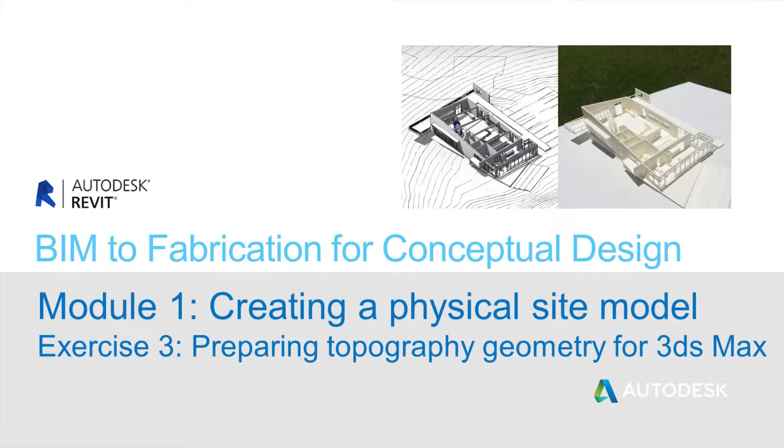In exercise 3, we're preparing topography geometry for 3ds Max. There's a few things that we need to do with the Revit topography geometry to make it work well with the CNC router. And we'll cover all of those things in this next exercise.

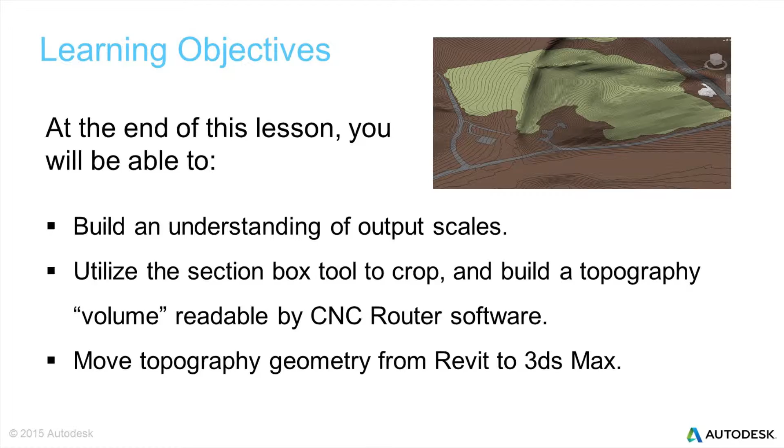So our primary learning objectives are going to be to build an understanding of output scales, utilizing the section box tool to crop and build a topography volume readable by a CNC router software, and moving the topography geometry from Revit into 3ds Max.

So looking at our current Revit topography model, one of the first things we need to do is establish a buildable scale for our physical model. So for an expansive site like this, I'm hoping that a scale of 1 inch equals 60 feet will work well. So one of the first things I need to do is build a new sheet inside of Revit. And this particular sheet is going to represent the size of my CNC router, not the software, but the actual hardware itself, which has a 4-foot by 8-foot bed.

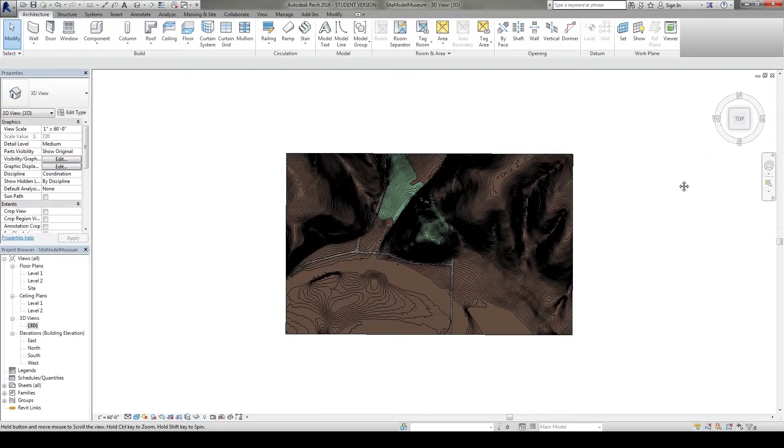I can take my 3D view, and I'm going to start just by using the view cube to orient to a top view, and I'm going to drag that view onto my new sheet that I created inside of Revit, maintaining that 1 inch equals 60 feet scale.

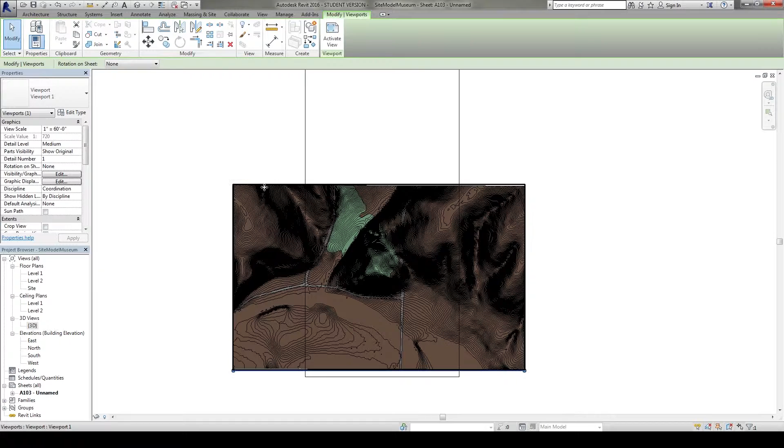So I can see right now that I could rotate the entire site 90 degrees and probably get it to fit. But I also know the site that I built has quite a bit of additional stuff on it that I don't necessarily need to see. The building site was that small area between the two roads and the fairly dense growth of forest.

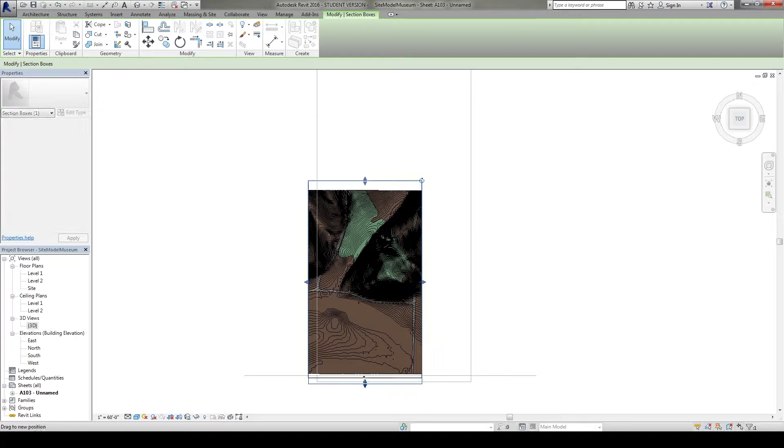So I'm going to turn on my section box tool, simply crop in and crop out some of the things that I don't need, and make this a slightly more reasonable file size to work with on the CNC router. So, this is going to give me something that's roughly a couple of feet by a couple of feet. And once I have that, I can compare that with the CNC router layout from my sheet.

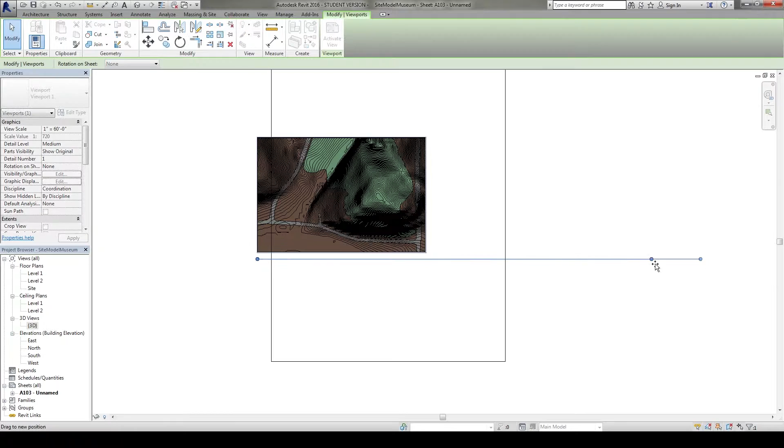And this is going to give me a sense of that one-to-one output scale, rather than always seeing something inside of Revit where 1 foot equals 1 foot. Placing it on my sheet gives me that sense of scale in terms of the final output.

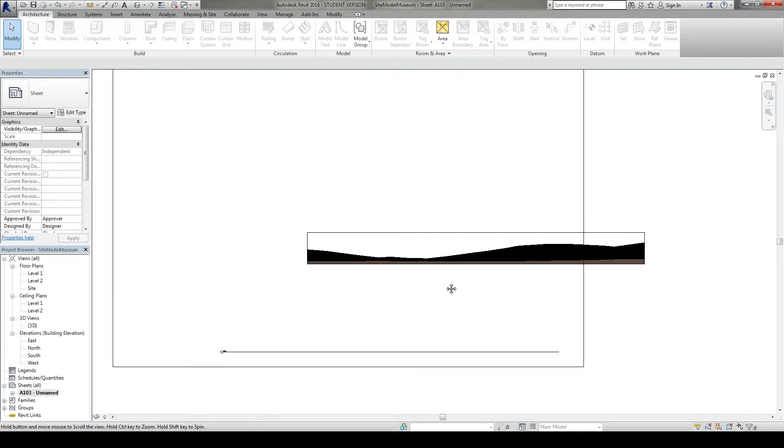Now there's one other piece of information that I need. I'm working with a 2-inch thick rigid foam insulation that I'm going to be cutting on the CNC router. So I also need to understand the depth of the topography as well, because as mentioned, this is a fairly hilly area. So I'm going to take my dimension tool, and again, I'm on my sheet view, so I understand exactly how many inches this is. And I need to make sure that my model is less than 2 inches.

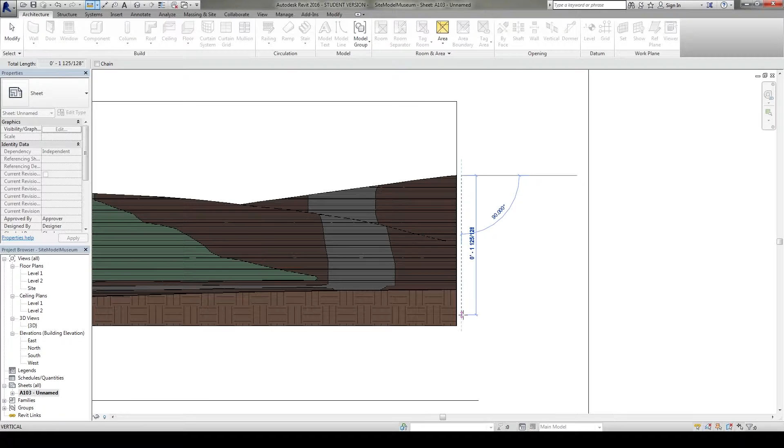It looks like I need to crop off just a little bit more of the bottom of this model, again using my section box. I'll move this bottom area up, and I know now that that should do it. It's going to be very thin in some places, but as long as I'm leaving about a 1/4 inch of material, it should work just fine.

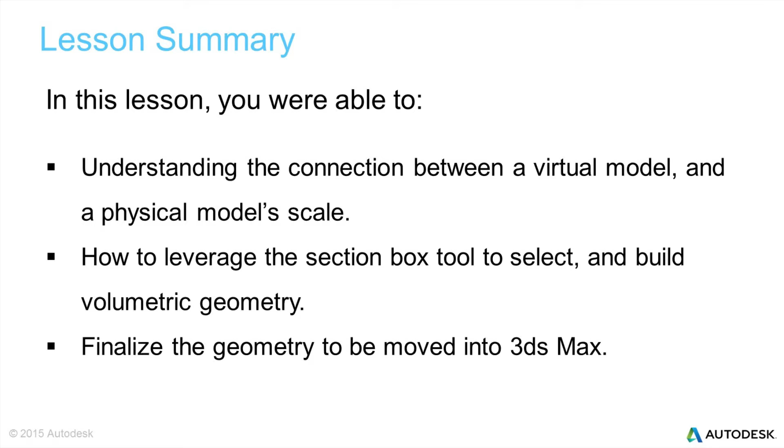So in this lesson, we built the understanding of the connection between the virtual model and the physical model scale, learning how to leverage the section box tool to select and build volumetric geometry. And now we're going to be moving the topography into 3ds Max for scale modification and output.